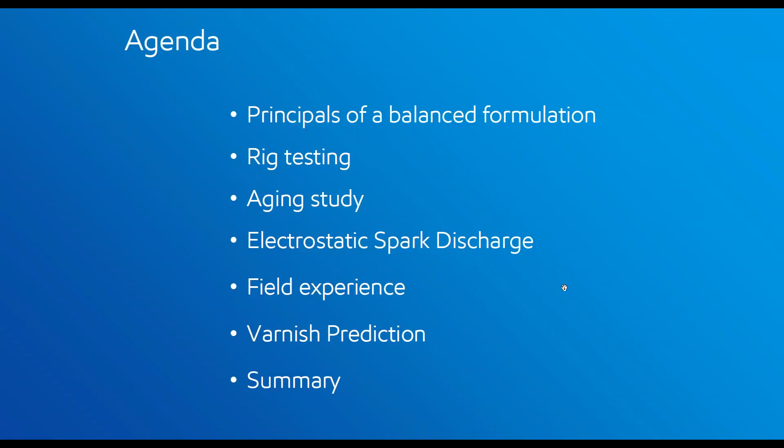So if you go to the next slide. So, and then I'll skip this. Principles of a balanced formulation is the next group. So the next one that has our spider chart on it.

Our spider chart is a way that we can visually demonstrate the quality of an oil. This one in particular is the quality of a turbine oil. So we have these key elements that we strive to be at a 10 out of a 0 through 10 scale. And so we have rust and corrosion, we've got air separability, we've got demulsibility, we've got oxidation stability, we've got foam control, and we've got deposit control.

And those are the key elements that we look to strive for our turbine oils. And to get there, we use the right base oils and the right additives blended in the right manner and delivered without contamination. And with that, you set the stage for a long service life for your turbine oil.

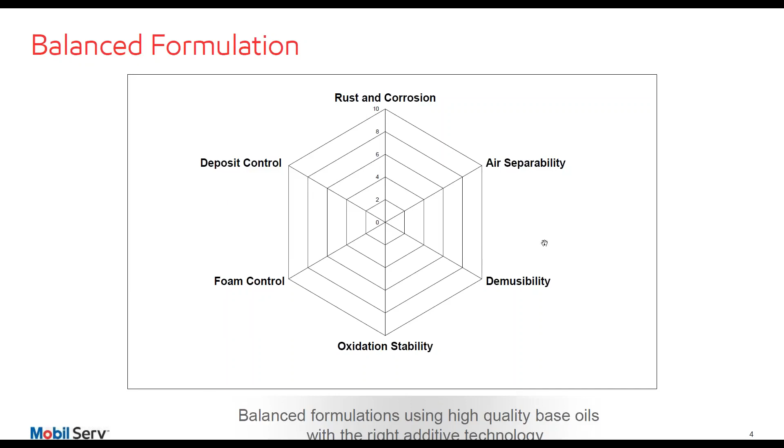And the other important thing to offer out to you here is within a group 1 or group 2, there are different qualities within these base oils. So you want to select the highest quality group 2 or group 3 base oils. And also, we do see benefit of using co-base oils.

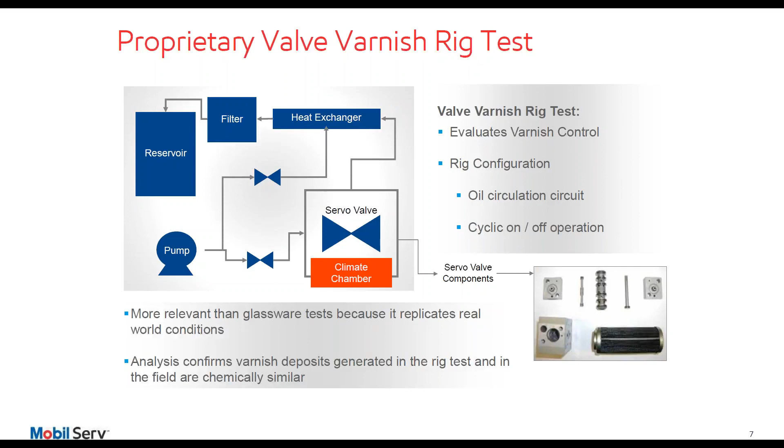We also run this rig like a lot of turbines are run, where we run it for 5 days and shut it down for 2 days, then start it back up. When we start it back up, that's when we look for that valve sticking, because it's very similar to a lot of gas turbine operations where maybe they're down over the weekend, and then Monday morning they go to start the turbine up and the servo valve sticks, because the oil's been cold all weekend and the products of oxidation have come out of solution and stuck to the servo valves.

If you go to the next slide, Carrie, this is just a picture of what that servo valve internals look like. You can see the sliding spool, the land, as it's described, as that slides back and forth. If the land sticks, then the servo valve doesn't move, and then the turbine can't start up, whether it's controlling the fuel or the air.

So these servo valves, specifically on the GE turbines, are using the same oil that's in the turbine oil reservoir. So you're asking that oil to do a lot, to be a turbine oil and a hydraulic oil, and to use these tight tolerance, 3 micron tolerant servo valves.

So we put the servo valve in this chamber, and then we look for, through voltage, we look for sticking of that servo valve.

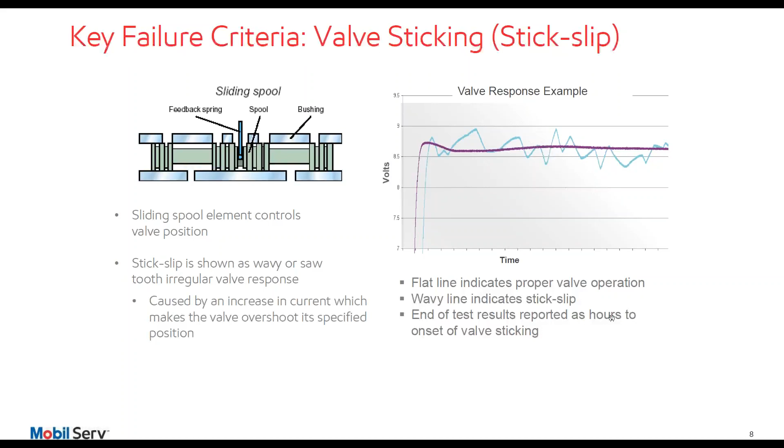Next slide is, in addition to the servo valve, we are also doing oil analysis. So we're doing ultracentrifuge, we're doing MPC, we're doing RULER as far as oxidation and varnish deposit related tests. But we're also doing physical inspection.

So on certain frequencies, the oil's drained out and the reservoir is inspected. To the lower right, you can see a good clean reservoir, and then you can see where that varnish is plated out in an in-service reservoir when that oil is hit close to end of life. The same kind of thing we see on the filters as we're aging that oil.

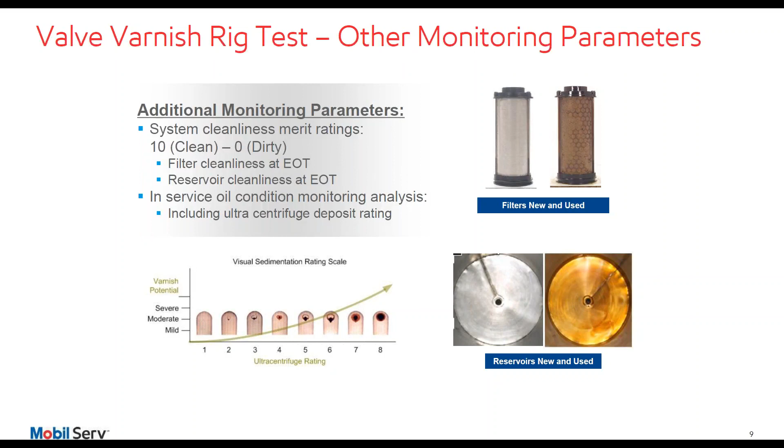So this is an eye-opener a number of years back when a lot of people in the industry for a long time were saying it's the companies moved to the Group 2 and Group 3 oils. I can tell from personal experience that within ExxonMobil, we had some good Group 1 oils that did a nice job, but boy, they had a tough time with those servo valves. They didn't last long at all in the field, and I had a lot of experience where they basically lasted about a year before we were having servo valve sticking.

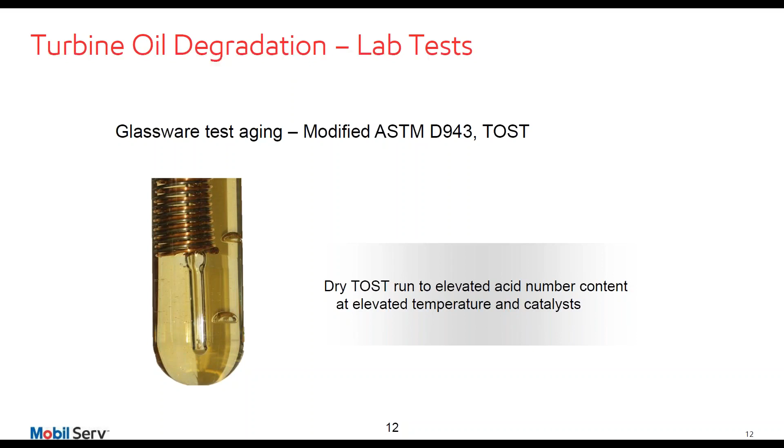And then we looked at ultracentrifuge rating. That's where you spin that oil at 17,500 RPM for a half hour, and you look at deposits. Then we did FTIR for oxidation. We did acid number. We did RPVOT. We did HPDSC, which is high pressure differential scanning calorimetry, as just another look to see if there's a chance that this test would tell us something different than the other tests did. A lot of people like this test because you can use a low amount of sample and it can be run pretty quickly. And then last we also looked at color.

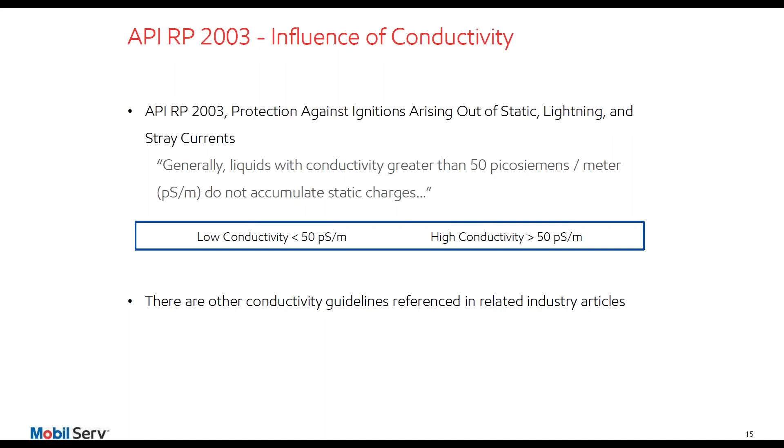So if you go to the next slide, Carrie, I'm on slide 16. One of the things I've seen written about that's blatantly incorrect is that people were blaming the base oils, saying you've got high spark because you've moved to a different base oil. We did a lot of testing to defuse that conversation and say, hey, it's not about the base oil, it's about the additive.

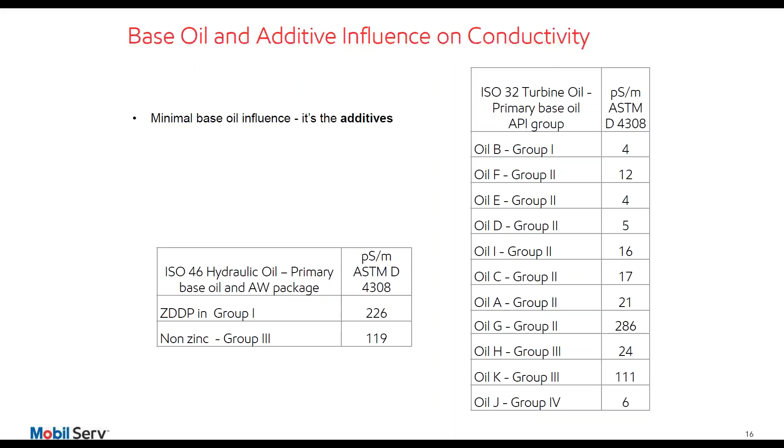So if you go to the next slide, Carrie — unfortunately we can't show you this video because I couldn't connect through PowerPoint on this presentation, but if you catch me I can explain it to you, or we've talked about it. Basically, we did some work with Hilco on some spark tests, and we put in what we would consider a low conductivity oil, and that sparks like crazy through filters. It has to do with having the oil cold, high velocity, low micron rating, and a steel back filter — you're going to get that oil to spark. It's kind of a lightning show, and you can hear the popping noise, which is pretty neat.

Then we put in an oil that had high conductivity. Its conductivity was 111, and that oil ran through the same system, and you couldn't hear a thing. You couldn't make it spark. So it did show you the influence of conductivity for making spark.

But what we would say is, again, we haven't seen where conductivity has actually impacted the oil's life. So we see it as a spark problem if a turbine is kept on turning gear for an extended period of time and the oil is cold and you can hear the sparking. Well, yes, that sounds like a problem and should be addressed in that way. But I would say 95% of the applications, turbines are not on turning gear for a prolonged period of time, and normally that's a transient condition — as soon as you're up to temperature, that sparking goes away.

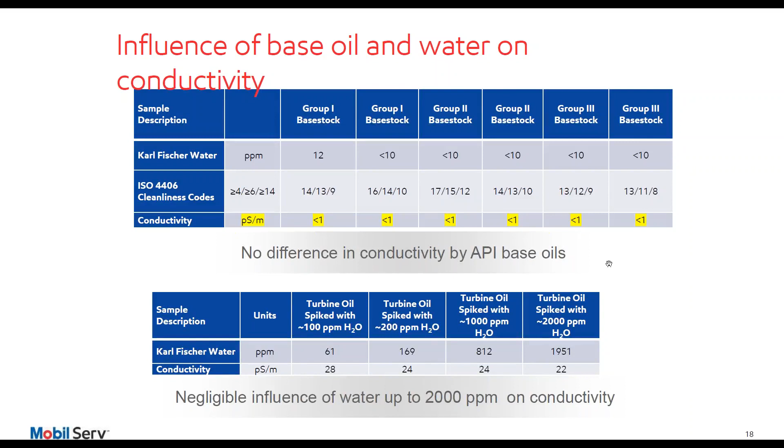If we're going to move on, I'm going to talk about field experience, let's go to slide 20. Again, this is the influence of base oil on turbine oils.

This example is some GE Frame 7EA turbines. These guys started out with a Group 1 oil in 1992. After about a year, 6,000 operating hours, they were starting to see servo valves sticking. They really struggled with this, and it was a problem because come Monday morning when they'd go to start up the turbines, the servo valve would stick, causing 6 hours of downtime.

So their varnish mitigation was to start doing frequent servo valve and last chance filter changes to get through this. Then we worked with them and brought a primarily Group 2 oil, and we did better - we got up to 3 years, 18,000 hours, and they were pretty pleased, but we still had those same kind of issues. Then in 2009 we brought them a primary Group 3 oil, and guess what? No servo valve sticking. We're going 8.5 years, 46,000 hours, and going.

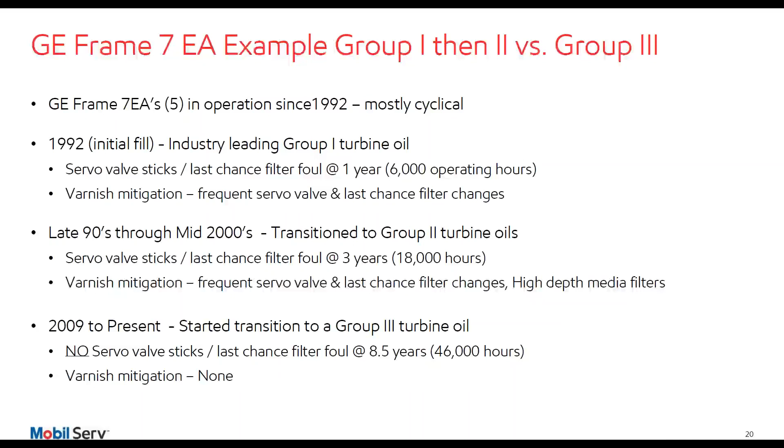So on slide 21, another example: we had a Group 1 oil on a Frame 7FA that at about 20,000 hours was starting to have those servo valve sticks. We did a flush and changed them over to a Group 2 oil. So far so good, and this oil is doing extremely well - no varnish mitigating. The customer's happy, and he doesn't even see the need to change it out at 65,000 hours.

So we're very pleased with that level of service. The other thing to point out: this Group 2 oil has what we'd consider low conductivity - below 50 or 60 picosiemens per meter, testing around 16. Some people would tell you that if you've got low conductivity, you're going to create spark and have a short oil life because it's the cause of all varnish. That has just not been our experience.

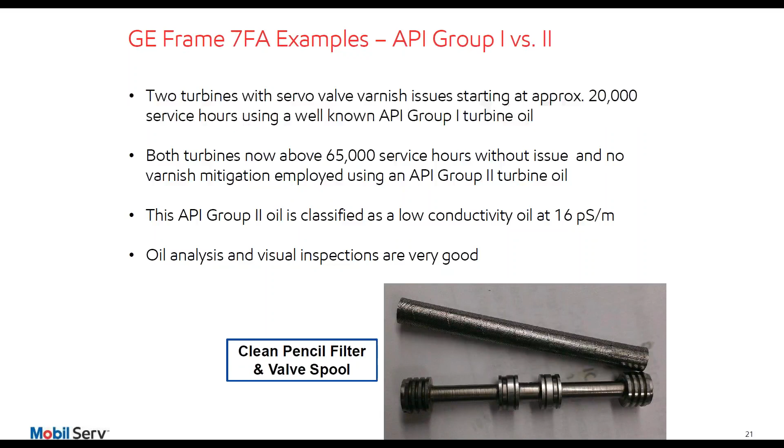Here's proof in the pudding - we've got 2 turbines running side by side that are now over 65,000 hours with no servo valve sticking. Here's some test data from that site, with these 2 different units, 7 and 8. You can flash through some of the data here - nothing really too exciting.

I'd point out our ruler numbers in this particular oil - another good point to discuss is that most oils use a combination of amine and phenolic additive for the antioxidant. By design, that phenolic converts into an intermediate that helps support the aminic antioxidant. So we know and expect our phenolic to go to 0. Some people out there say that's problematic, and you should be changing your oil or sweetening it. We are extremely confident in saying that when our phenol goes to 0, we expect it, and it's doing what we expect to see.

So here's this oil with 65,000 hours in it, and our amine is still around 50%, while our phenol is down at 0 - behaving just as we'd expect. The customer is pretty darn pleased and is going to continue to run this oil until, I guess, bad things start to happen. But at this point, based on the data and its performance, they're pretty pleased with how this oil is functioning.

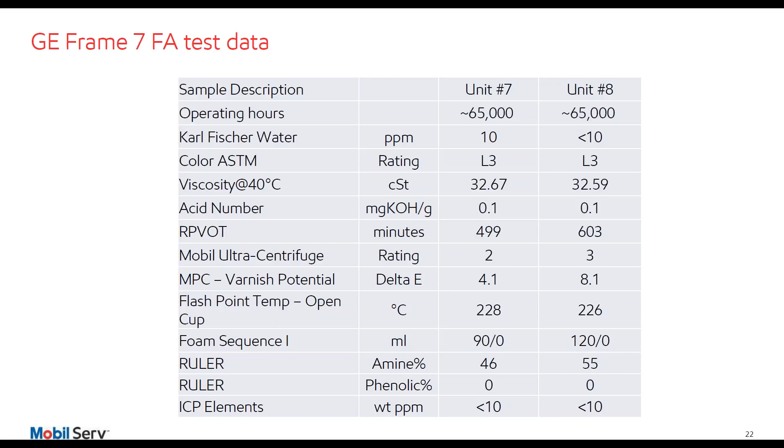So if you go to the next slide, slide 23, this is a story about a Frame 7FA that started with a Group 1 oil, then went to a Group 2, and then went to a Group 3. This is the transition timeline: in 1998 it started with a Group 1, then in the late 90s it moved to a Group 2.

During this time frame they were doing varnish mitigation, and their basic approach was using electrical heat tape on the hydraulic lines to keep those lines heated, as a way to minimize products of oxidation plating out.

Then in 2010 they transitioned into this primary Group 3 oil, and to date, no servo valve sticks, no varnish mitigation, and good service life. They're well above that 64,000 hour mark, which is the GE overhaul to overhaul time frame. That's a major milestone for us and for most people in the industry - to go from overhaul to overhaul without being concerned about having to change your oil.

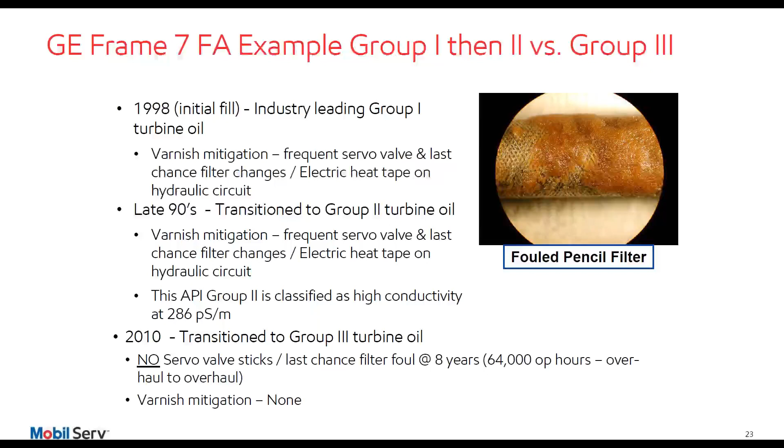Slide 24 is an example of using a Group 4 oil. This used to be a Group 1 oil in these Frame 6Bs, and they were having servo valve issues at about 13,000 operating hours. Then they moved to a Group 4 oil and had done extremely well for 9 years, over 65,000 hours. Again, just another indication that when we upgraded the base oil, we've actually done a lot better, contrary to some people's belief that they were better off in the old days.

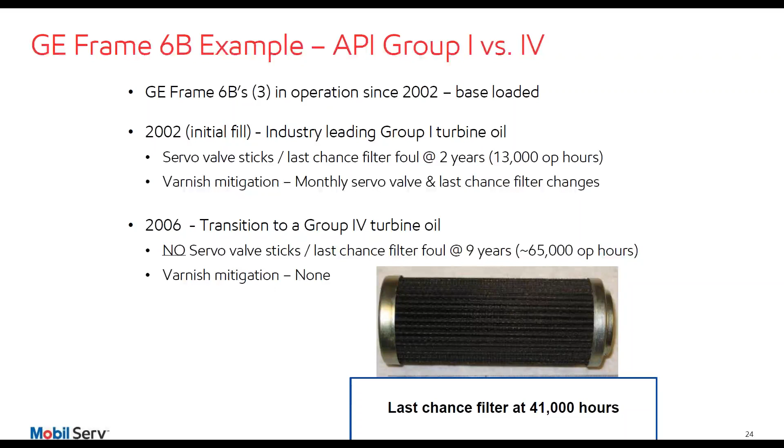One thing our lube engineers and sales engineers are very good at doing is working with their customers to actually do physical visual inspection to confirm oil analysis. You can tell real quickly whether you're having a problem based on a visual inspection as a way to confirm the oil analysis that you're seeing.

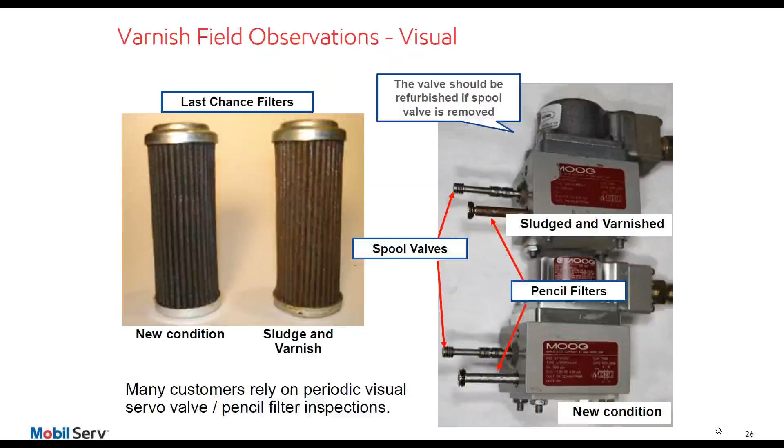So Carrie, if you go to slide 27, this is after a lot of different testing and a lot of different methodology, whether it was rig testing, aging testing, or field testing, we've come to our internal ExxonMobil suggested limits for our products. We can't speak for other products, but these are the ones we use in-house. A lot of this is actually based on ASTM D4378 recommendations, and we are very involved in the writing of those standards as well.

But we look at, when you do oil analysis, that you really can't rely on one test alone, and we look at a multitude of tests, and our confidence is in these tests.

So the ruler testing, or linear sweep voltammetry, when we get to 25% of our initial value of the aminic, that's when we get to a caution limit. It's not a panic limit, it's a caution limit. We expect our secondary antioxidant to go to 0, and that is not a concern when the phenol drops to 0. It's the amine that we've got our eyes on.

Then for MPC, membrane patch colorimetry, the important thing is to look at the delta E, the change in color rating for us. If you use a scale, that's okay too, but appreciate it can be represented in either delta E or a 0 to 100 scale. Our experience has been when we see 40 or greater, that's a time to look at it as a caution.

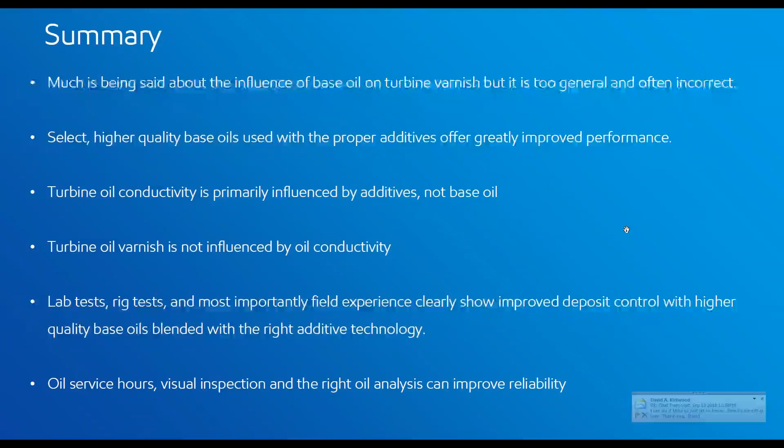Okay, let's do one more. I have Pat asking, in a hydraulic system that is loaded with varnish, are there varnish cleaners or removers on the market that will clean up the system?

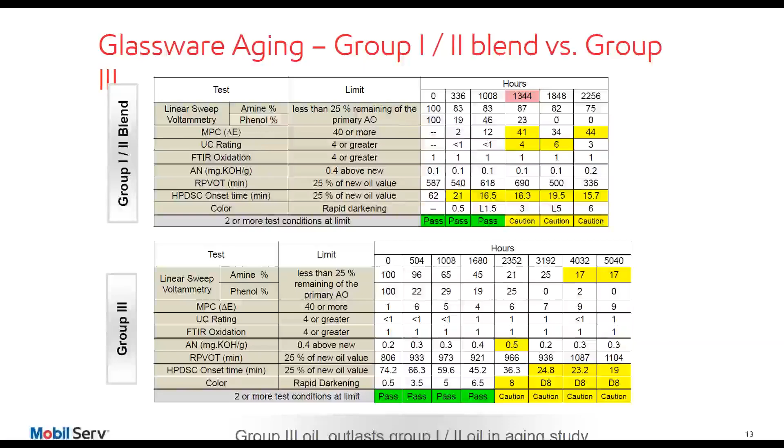The high depth media works extremely well if you chill the oil before it goes into the high depth media. We've seen that in physical examples, and we actually use that same thinking when we built our test rig - that's why we chill it, to have those products of oxidation come out of solution and stick to the high depth media. One thing we've found is if it was chilled and then you heat that oil back up, everything locked into those filters releases again. So it's good to keep that at a constant cold temperature.

Lastly is the resin technology. One of the really nice things about some of the resin technologies out there is they give different chambers - maybe upstream of resin you would use high depth media. I've seen some filter systems where you have high depth media followed by two resin beds, and I've seen very good things happen in those kinds of applications. So I think your experience is similar to what I've seen in the field as well.

We have time for one more, and I'm not sure if we can answer this because I'm not sure what slide he's referring to. But Josh is asking, are the additive packages in all of these the same, with the base oil being the only variable? And the answer is no.